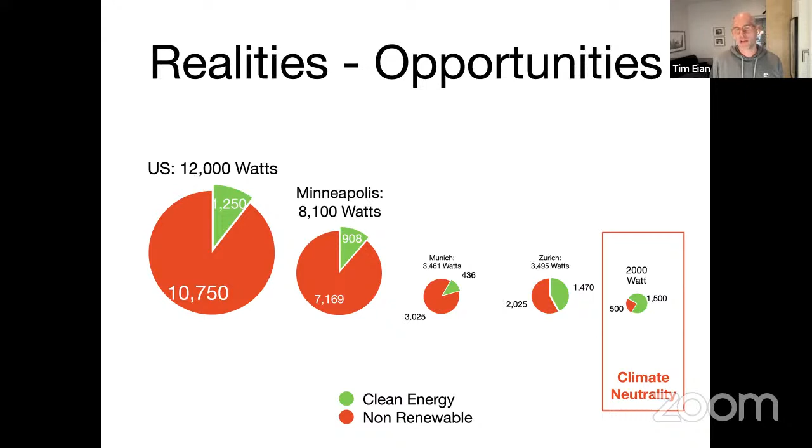Bad news and good news again, realities and opportunities. At 1,500 watts of renewables, we're almost already there, because in the United States today we consume about 1,250 watts per person in that way. So ultimately, if we can conserve properly, we don't actually need a much larger green grid. There's also some good news here.

One of the questions we have to ask ourselves, if you're a legislator, a mayor, a governor or president, is how do we want to invest into the future of this country and our people? We can do it two ways: substitute and try to make all the energy we consume green—that's a huge investment—or replace wasteful energy use with efficiency and get rid of it. We can look at sufficiency, how much of anything we need in our lives, and maybe find savings there, and the rest can come from clean energy.

This is a general discussion we should all be having, and obviously our elected officials have to conquer and ultimately lead on.

When we're talking about buildings, there's one big elephant in the room. I know from talking to EV owners and people with PV systems on their roofs, this is something a lot of people quickly overlook. When we look at the energy footprint, especially here in Minnesota, our biggest energy expense is actually not electricity, which is easy to get green, but natural gas, because we have massive heating loads. Where are they coming from? Our buildings. That is really what we need to conquer.

The bad news with gas is there's really not a good replacement for it on the horizon that makes it completely climate gas neutral.

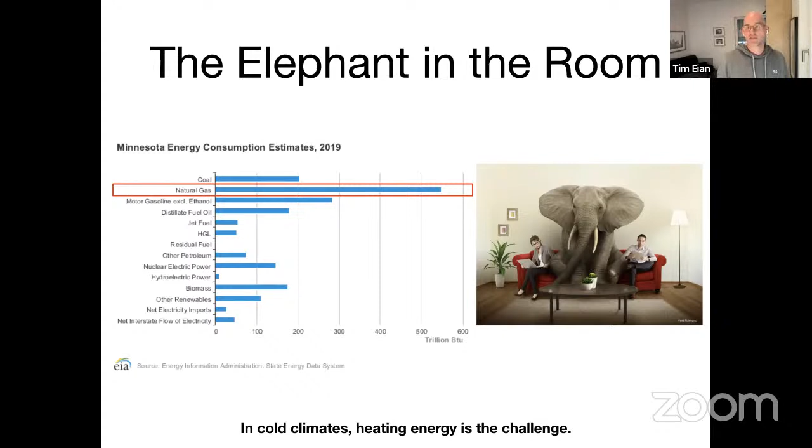So we really haven't fixed the problem with the building, but we've put an alternative energy source on the roof. And here's where a lot of the misunderstandings come in. I find that most of the populace around me thinks that with some solar panels on the roof, they can wipe out their entire energy footprint or carbon footprint.

And it couldn't be further from the truth. Most people struggle on their own roof to break even with their electricity bill, let alone the heating and hot water energy use. So this is really questionable, if this incrementalism approach is ever going to get us to a substantial leap in buildings that'll push us in the right direction.

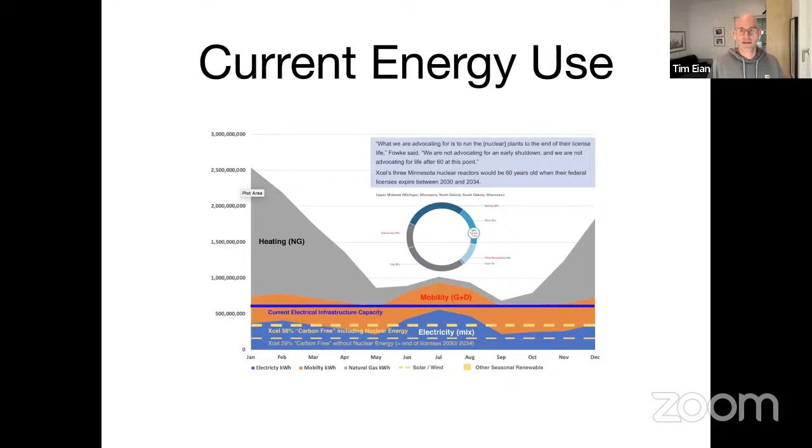So we have an issue here where right now our electricity companies are already struggling with a hot summer day in the middle there somewhere to get on top of a cooling load peak. Now imagine what they'll do when we all switch to electric furnaces in January, as you can see on that graph. It's insurmountable. And then on top of it, we all want to drive electric cars, and then we want to fast charge them. You can start to get a picture of what the dilemma is.

So the current clean energy plan for a state like Minnesota, which is substitution, electrify everything, simply doesn't work. We don't have the electric capacity to do that. We don't have seasonal storage. There's a whole slew of issues that isn't really solved for this kind of approach.

And the smorgasbord that I'm faced with in my job on a daily basis is that, again, people think some solar panels on the roof will surely fix it. And then we'll talk about net zero this and net zero that, and a high efficiency furnace and a high efficiency AC. I can tell you from field notes, what I've learned in over 20 years of practice in Minnesota, none of these things are going to get us to carbon neutrality in the built environment, which again locally is about half of all the emissions that we're facing.

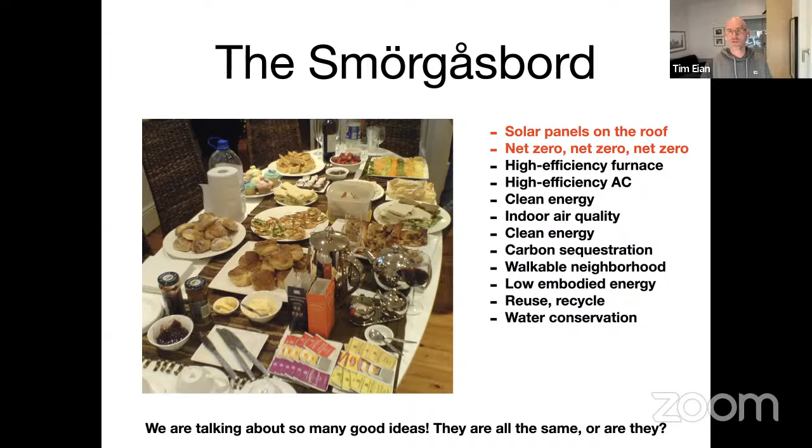So there's a lot of great ideas and they all have their place. Don't get me wrong, we need to do all those things too. But there's also, unfortunately, a lot of greenwashing in the sense that we're constantly being told everything will be fine, the track that we're on will lead to success, when practitioners like myself and my colleagues in the field see that that simply isn't going to work.

And so the impression, and the reason why I want to talk to you about conserving energy in a home setting like a passive house, is that we cannot solar panel our way out of this. It simply isn't going to work. We need much better buildings and much better building envelopes in particular.

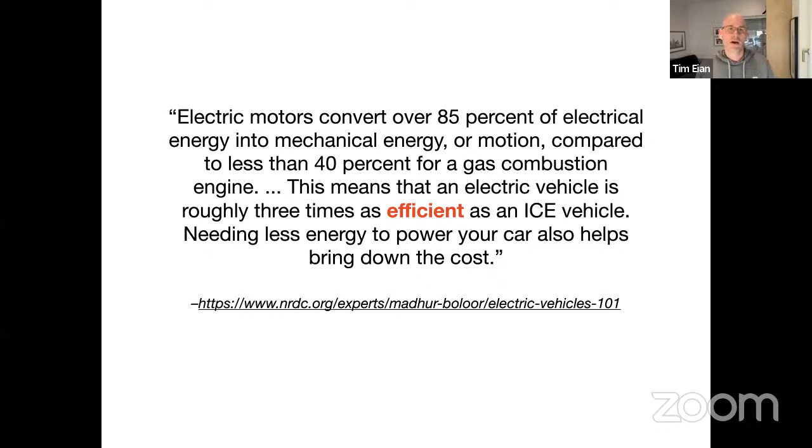And as an EV owner, you know that, and you experience that every day, because an electric motor converts 85% of energy into mechanical energy, whereas a gas combustion engine maybe can do 40, and that's, I think, already being very kind. So efficiency is really the name of the game. The more efficient we can be, the less energy we need to do exactly the same thing. So that's really what it comes down to. I simulated that for the city of Minneapolis in a study that I did for them.

The answers for buildings are really simple and basic. This is kind of a joke in our internal circles—to make such a high-performing building, it really doesn't take very much at all. We're not waiting for a big Tesla-market-disruptor type technology.

We use insulation, we use more of it. We seal buildings up tightly—that's tapes, caulks, sealants, readily available at any home improvement store. We do something called avoidance of thermal bridges, which in layman's terms means: if you go outside on a cold winter day and rip the arm off your winter jacket and let your naked hand and arm dangle out, that's a thermal bridge. Now you've got part of yourself out in the open, and that cold creeps up your arm under your jacket and makes you cold.

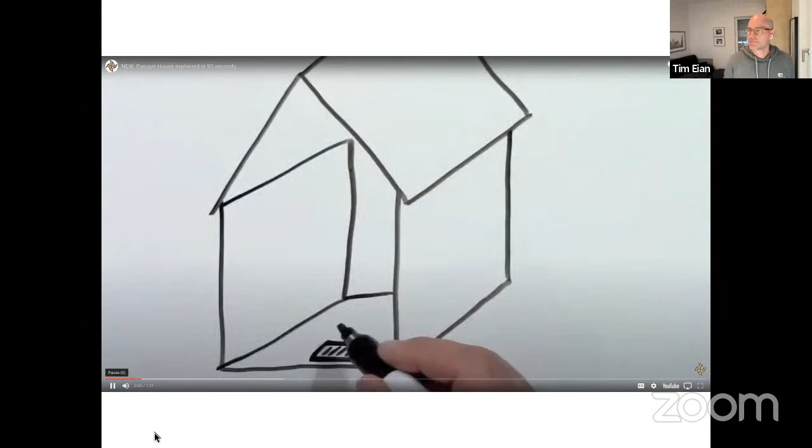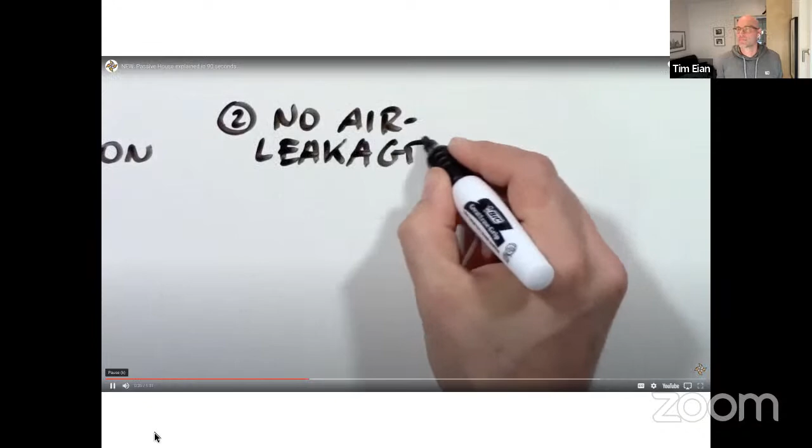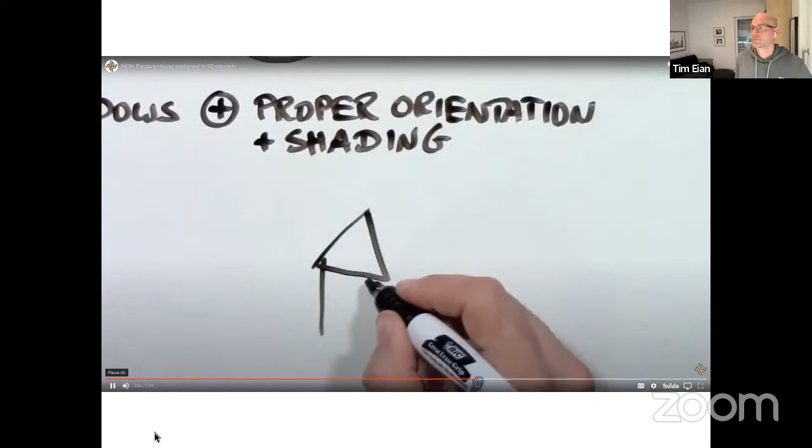Passive House explained in 90 seconds. Does your house have a heater in the basement or maybe a fireplace? Probably also a central air conditioner or maybe a window unit. Did you ever wonder if it was necessary? In 1991, Dr. Wolfgang Feist built the first passive house in Germany based on research from all over the world. Here's what he did: 1. Proper insulation—it's just like wearing the right winter jacket. It also doesn't need a heater. 2. No air leakages—there should be no holes, small or large, to let warm air out of the house. 3. No thermal bridges—a thermal bridge is like a road for heating energy in which warmth can travel right through your walls. As a matter of fact, most of our houses have thermal highways in the walls where heat can easily travel to the outside. Plus, the house needs proper windows, most of the time with triple-pane glass, and it needs to be oriented properly so the sun can heat it in winter and shade is provided in summer. And it uses an HRV, a device that provides the inside with fresh air without letting the heat out. Add all these things up, and it turns out your house doesn't need a heater or an air conditioner. So where does the heat come from? A passive house needs 90% less energy, and that can easily be supplied by your body heat, the sun, your appliances, light bulbs, and even your TV. This saves you a lot of money on your heating bill and helps preserve the environment. Did we make it in 90 seconds?

So there it was. All right, so basically a quick recap of what I said. For those of you who prefer a graphic, here's a quick graphic that shows these five key components again.

I'll put one little caveat over the top of this lovely video: in Minnesota, because of our weather extremes, we do need a little bit of a heater, and we also need a little bit of an air conditioner. In a moderate Central European climate where this originated, you can basically heat and cool with the ventilation system, no additional systems needed. In Minnesota, we need a little bit more.

To put that in perspective, the house I live in is just over 2,000 square feet, and on the coldest day of the year at about -25 outside, I can heat my house with 2 hair dryers going at the same time. So you get an order of magnitude there. I still have a heating and cooling system, but they are very, very small.

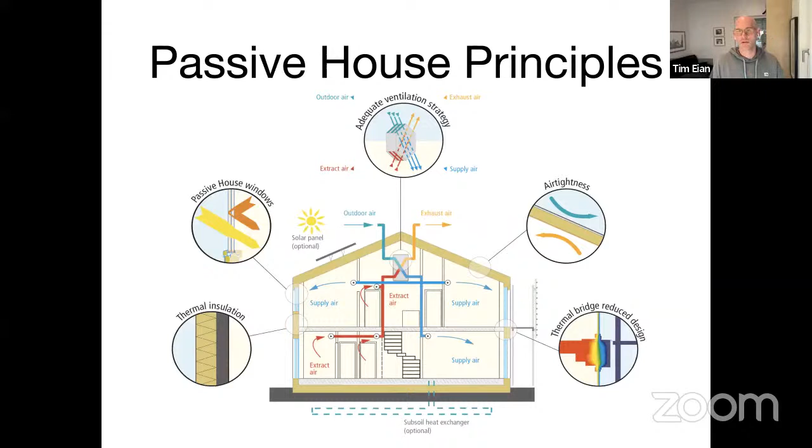So then, in the vein of what is the potential of this: you as EV owners can see about 50% savings in energy and emissions over ICE engines. In Passive House, when we apply it to new construction code buildings, we're typically seeing above 50% improvement on overall energy consumption and footprint. When we retrofit older buildings, we generally see over 80% savings, with extremes landing over 90% on some completely uninsulated buildings we've worked on.

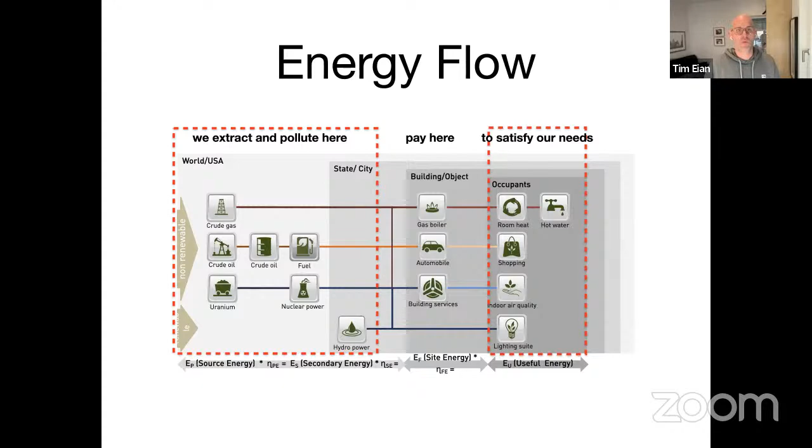I also want to give you a quick update on a better path, I think a better path. I did some work with the city of Vancouver some years ago, and they are doing a track of sufficiency, efficiency plus renewables. The conventional pathway of extracting energy and creating a bunch of emissions to satisfy our needs for light, heat and hot water—they looked at that and said, that's just not sustainable. We got to come up with a better system.

So what I told you before, we still need renewables here. We can use hydro, we can use the sun, we can use wind to power a bunch of stuff, but then immediately you run into this issue of, well, there's just not enough of that to go around, and the sun doesn't shine at night, and the wind doesn't always blow. How do we deal with that?

So the key messaging from my first section tonight is that efficiency is the first renewable energy. If we use that wisely, in the case of a building, we're looking at Passive House, this building energy standard I'll be talking more about tonight. Then we partner that with another thing I haven't gotten into yet, which is embodied carbon—using materials that have a small energy and carbon footprint. Only after we've done that do we electrify everything. The notion of electrifying everything is still right, because that's the fuel we understand how to make in a green way. So that's correct, but we need to compact ourselves first before we do it, and then we can fuel it all with clean energy and get to meaningful climate action.

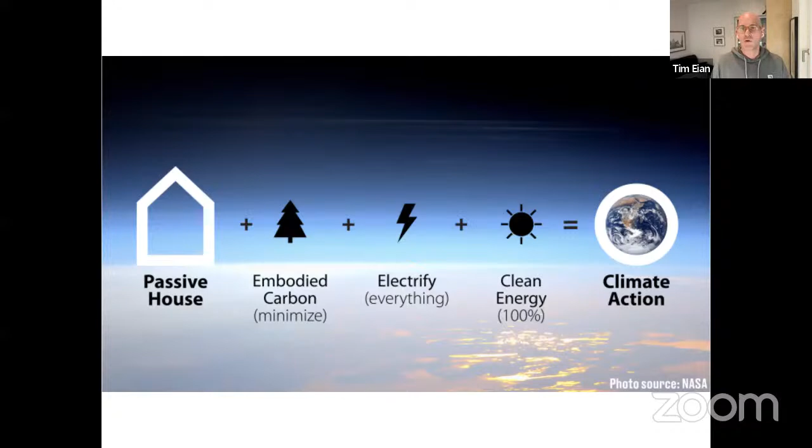So that's my appetizer for you to sort of embed the whole conversation of why do we need to make substantially better buildings. For those of you who want to follow up, I'm not going to leave this up a long time, but there's some links I can send out later. There are some good articles on that.

Transport and building emissions aren't separate. It's another sort of rabbit hole of, we live here, we work there—is that really an efficient way to go about life? With COVID, that's actually changed perhaps for the better for many of us with work from home. But that's another discussion worth having.

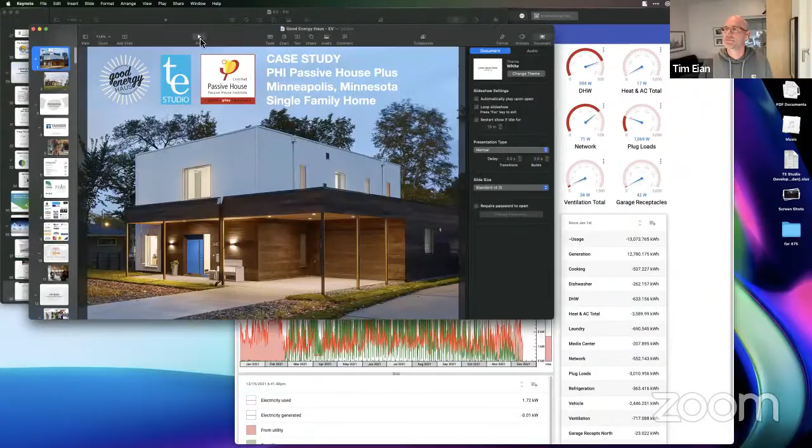So that's my opener. Yuka, if there are already burning questions, I'm happy to take a couple now before I get into the case study. No, I don't see any burning questions yet, so just keep going. All right.

Quick transition. So we'll talk a little bit more about the house. We gave our house a name. It's called the Good Energy House. And that was done on purpose because, again, we want to be part of the solution, not part of the problem. So we want to look at energy not as the problem in the room, but something that can also be good.

You're looking at the front facade of my house. This is the front entry here. It's covered. I have an attached garage with a garage door that you can barely see. I don't want everybody to look at the house and think that I live in a garage, but wanted to detract from that a little bit.

And I made this canopy so that people can arrive safely in any kind of weather. We have zero-step entries. And these are all just ideas that I do practice as an architect to make sure that buildings are valuable to their inhabitants and to future generations. So building in an accessible way is important to us.

Also, utilizing earth-friendly building materials. We could talk about that more—it's not going to be my main focus today, but I use a lot of either recycled materials or natural materials where I can in my architecture to further enhance the whole value proposition. Some of it you see in this image here.

For Minnesotans, because we care about water quality, I will also have you know that we have stormwater managed the entire site. Just to the left here, it was just coming in at the time, is a giant rain garden. There's one in the front and the back, and we are proud to capture all of our stormwater on site and infiltrate.

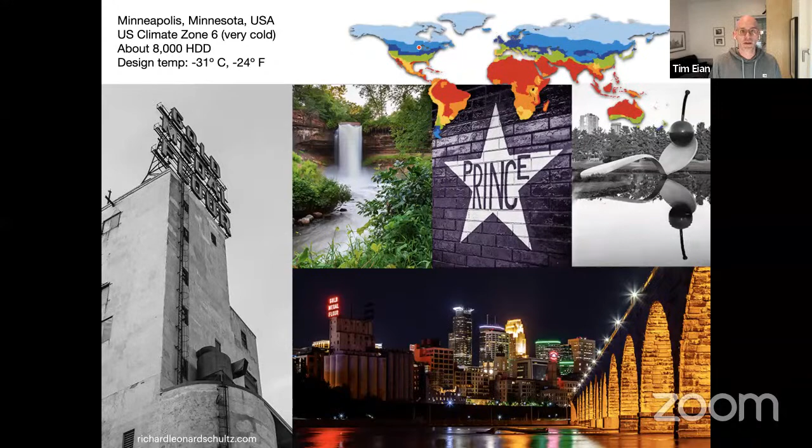I live in Northeast Minneapolis. My family and I were fortunate enough to buy a property on the same street where we had lived for 18 years. The property was completely dilapidated, and while this doesn't really matter for the Passive House, it's part of our story. I'll show you a couple of pictures.

We're also on a footpath that connects a few blocks up here where I live, and it's a unique feature. People walking by on walks isn't typical, and we really enjoy that—meeting people that way and waving to them and saying hi.

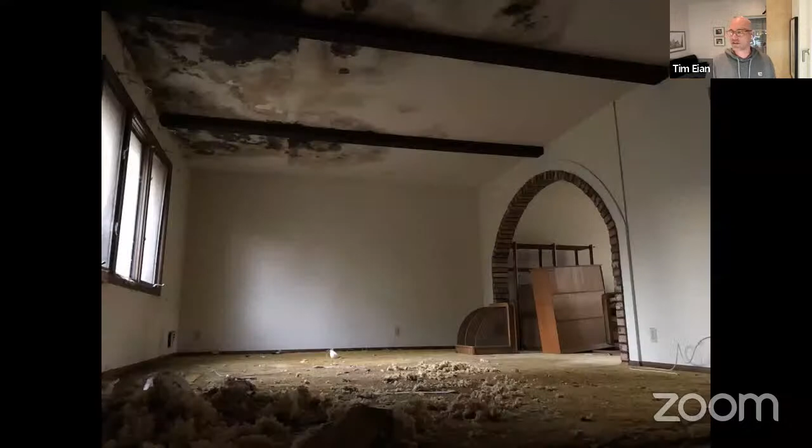When we bought the property, it was completely run down. Unfortunately, it was still inhabited, and there's a longer story I won't share tonight. This isn't entirely uncommon—I've seen other houses like that, and I want to remind you to keep an eye on your neighbors, because there are people out there living in conditions like that who need desperate help. Think of them, especially as the weather turns.

The house we purchased wasn't really sold as a home. It couldn't be, legally—it needed to be demolished. So I'll give you a quick sense of how quickly a home goes down.

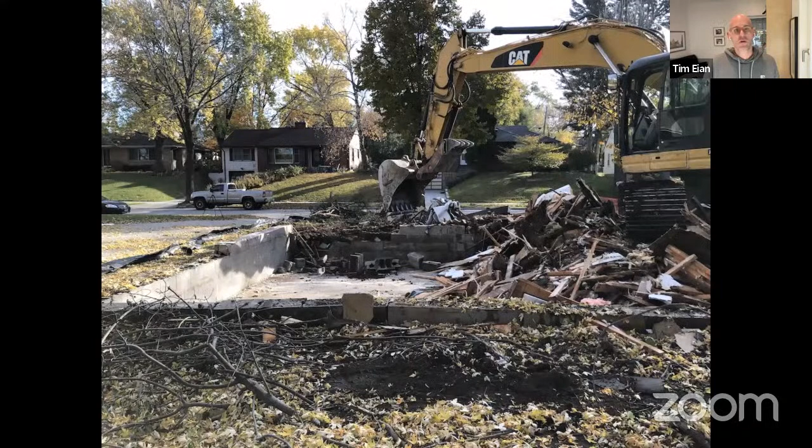It was 1970s or early 80s construction, and the whole building was disposed of in less than an hour. There's not a lot of girth to how most of what we build is actually built. The foundation took about as long to pull out as the house did to demolish. Then we started from a clean slate, more or less.

We had the good fortune of acquiring a double lot, 80 feet wide. Looking at it on the east side, to the left is south, and there aren't many obstructions, which is wonderful for passive solar design—part of why this property appealed to us. Let's browse through a couple more pictures.

The old home also had the garage on the south side, so there were no windows there. The first thing we do on a lot of urban sites when we develop them is turn the whole layout. My house now sits basically turned 90 degrees, so the long side faces south, giving maximum capacity for bringing in free heat.

And then when we come up to the second floor, I'll start at the stair again. You come up to a landing. There's a hallway on the south side, the bottom here of this drawing. There's a couple of kids' bedrooms where my girls live.

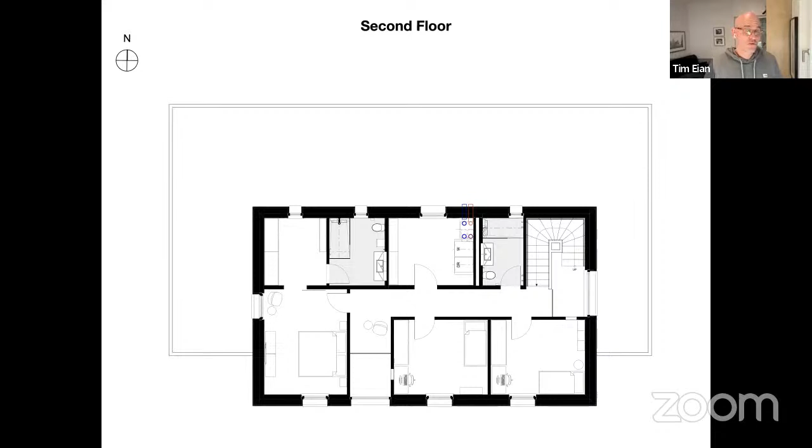And to put that in perspective, everything that sits in the ground is at about 2 to 3 times the code required levels of insulation. The same would be true for the main floor walls.

When we get to the roof, Minnesota roofs per code are fairly well insulated. We're looking at only about 80% more insulation than what code would require. But in general, it would be fair to assume that you're installing about 2 to 3 times as much insulation into a passive house as you would be to a code normal building.

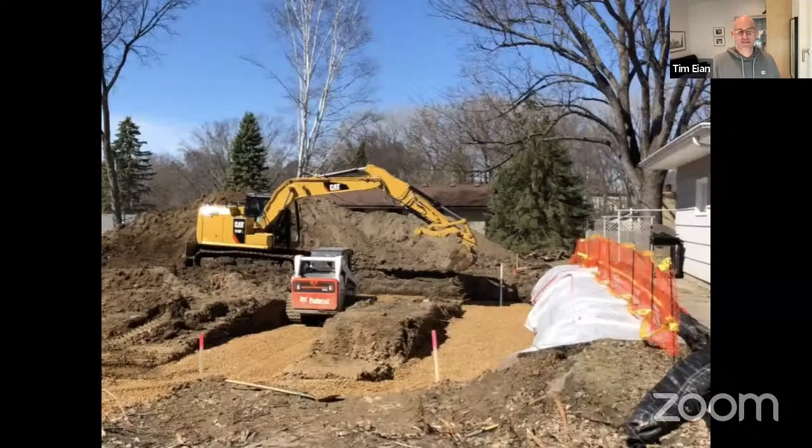So then let's build it from the ground up, right? First thing is you dig a hole for the foundation. Again, this doesn't have a basement, so you see these sort of trenches outlining, that's where the foundation itself for the building went. Then you put a crushed rock down. This is all standard stuff, I won't dwell on it.

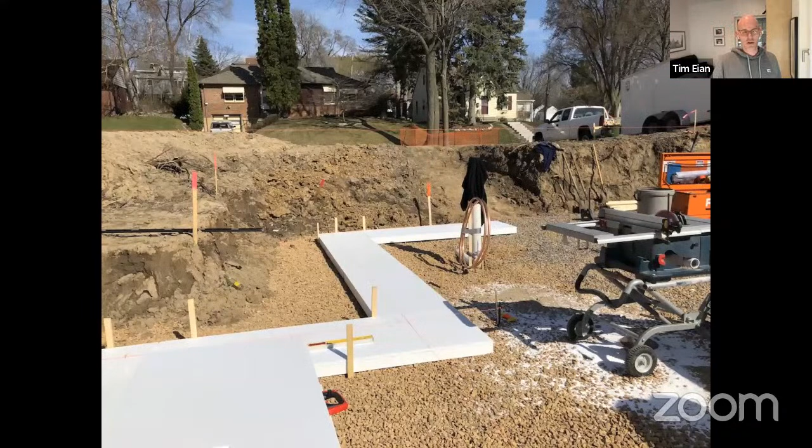This is where it starts to get exciting. So we use EPS foam insulation at a certain compressive strength to set the whole building down on top of. So you can see the outline now of the exterior walls being formed from this stuff. It's 4 inches thick. And then we take more of it and we create sort of a bumper. So rather than pouring a piece of concrete and then trying to figure out how to insulate it, we actually learned over the years we can build the form from the foam.

And then we go about it in a conventional fashion, put the rebar, the metal in it and all that, and then we float it with concrete, and boom, there is an insulated foundation right there that we can now build the whole house on top of, and the thing is completely packaged up.

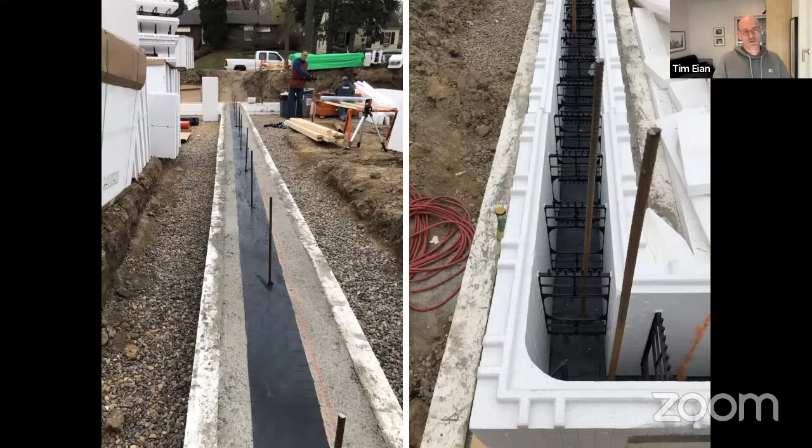From there, we have stem walls. So these are sort of half walls. In Minnesota, you have to, depending on where you are, go 3.5 to 5 feet down and then build back up. So we have walls that we need to set on top of this.

We used insulated concrete forms, which look almost like a Lego block, but they're hollow in the middle. Foam on both sides connected with a piece of plastic or a series of little plastic connectors. You just basically stick these things together and build up a wall out of it. You end up putting steel, rebar back into that as well. And then you order up the concrete truck and they fill the whole cavity full of concrete.

And so this does 2 things really well. Because it's an engineered system, it can be thinner than freestanding concrete walls. So we don't use so much concrete, which has a huge energy footprint, we use a lot less. And then secondly, we already get a good insulating value out of this wall. So that means that we have essentially a skirt all around our building that keeps the frost out.

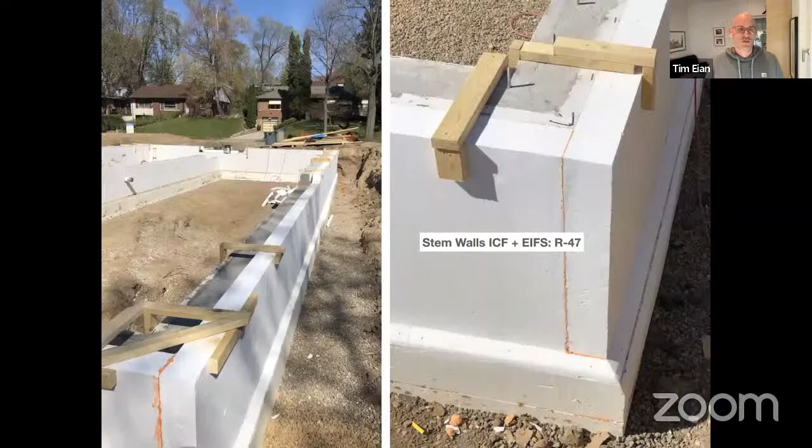So when it's all said and done, it looks something like this. We got the sandwich here with that floated interior concrete piece and foam on the inside, foam on the outside. For passive house, we needed more insulating value, so we clad it again with more foam. I say foam, that's one product readily available here in Minnesota and useful in this application, but there are other products, and there's some new stuff coming out that's perhaps a little less environmental impact and does the same thing, but I digress.

On the inside of the footer, you can see there was a little concrete still left exposed on top, so we even cover that up with foam panels. So the entire thing is packaged up and completely disconnected from the ambient air and dirt. And then we waterproof it. Nothing too exciting here, there's waterproofing stucco products out there that get troweled on. So essentially what we've built now, and this would be the same if you had a basement versus what I'm doing here, is a completely fully insulated, waterproofed, sealed up building envelope with ground contact that can go in the ground. After that's done, it gets backfilled inside and out.

And then some of the utilities go in, the plumbing has to go in, nothing too extraordinary here. And from there, we can move on to building the first floor walls.

So we decided to go for a wood wall because that's very environmentally friendly. Wood stores CO2, so building with wood is fantastic. We made prefabricated wall panels on site and then craned them up to where they needed to be. This is really no different than most home builds you'll see, with the exception that our studs are a little bigger. We use 2x8s, and we framed them only 24 inch on center, not 16. What that does is give us more cavity for insulation and less of the wall is wood.

Why would you do it? Well, insulation, as the name has it, insulates really well. Wood is not the greatest insulator. So we want to minimize the amount of wood in the wall and maximize the amount of insulation.

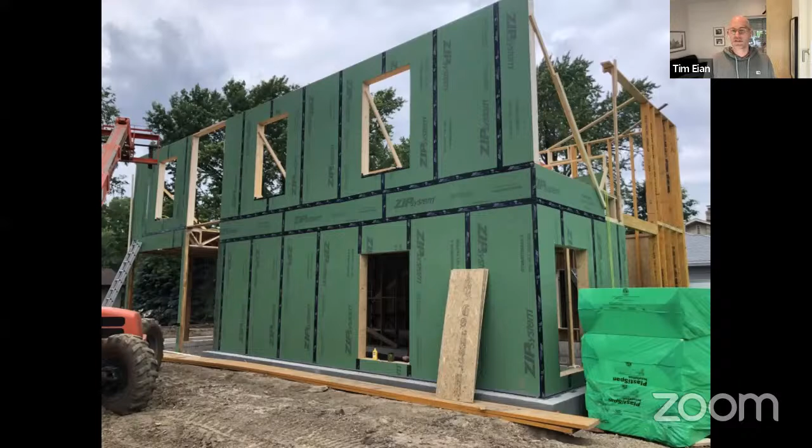These are just framing impressions, nothing much to see here. But in this picture, you can really see the air sealing coming to bear. And this product, if some of you have seen it in a different context, don't be confused. This paneling we're using here is sometimes used as exterior sheathing and weather barrier, but we're using it purely to air seal the house.

We're doing that in this layer so that we're not relying on a plastic membrane, which commonly in normal houses people would put on the inside of the studs, staple up, and drywall over the top of. We wouldn't want to rely on that because every time somebody puts a picture on the wall or hangs a shelf, they'll put a hole in that system and it will stop working properly. So we air seal this sheathing, which is about 8 inches in from the inside of the wall, and the chances of anybody ever wrecking this layer or compromising it are near nil. That's the appeal for us.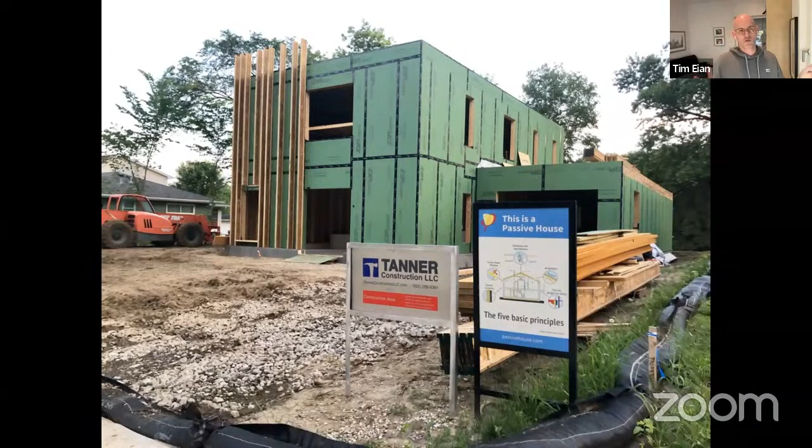We can get these in different depths, so we can dial this in specifically to meet our energy targets. In this case, we had a 2x8 wall, so the structural layer is about 8 inches, and we put 10-inch I-joists, as these things are called, on the face of it. So the structure of my house is 18 inches thick, and all of it is insulated. You can see a little bit more here, what's going on there with those things going up all the way around.

So we have now 2 cavities that we can fill. The next thing is the roof goes on. We have a low sloped roof, not a flat roof - that's a misnomer. All perceived flat roofs have a slope to them, and they drain to what's called scuppers. You can sort of see them here on this aerial shot.

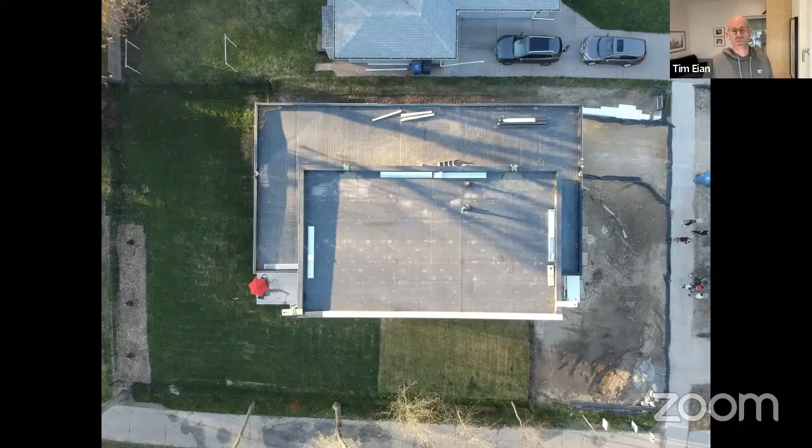At this point, effectively, we have sealed up the building enough so we can start thinking about putting in windows and other things. We built this in the summer of 2019, which was an extremely wet summer for any of you who remember that. So this system was put to the test immediately and often.

Once this box was up, we also looked at putting in the slab. In Minnesota, we have a radon ordinance - we have to put radon mitigation systems in place per code. To do that properly, you fill up the area, whether a basement slab or first floor, it doesn't matter, with rock, basically just gravel. Then into that goes a radon system. I'm not dwelling on that here.

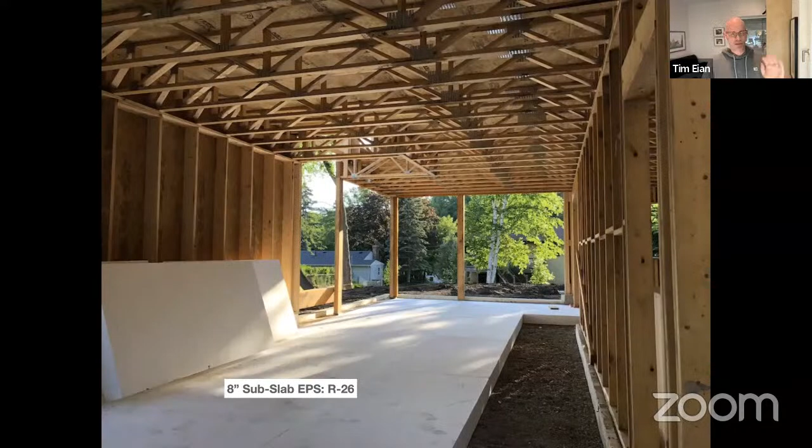From there, we're filling it in with EPS foam once again, because it has ground contact - it has to be a material that can stand that sort of condition. In our case, we used 8-inch panels. For most of my projects, these will be 6 to 10-inch panels, depending on how the energy model tells us is needed.

That system also wants to be completely sealed up for a number of reasons. We don't want air leaking in, we don't want air leaking out, we don't want moisture, and perhaps most importantly, we don't want soil gases like radon and other gases that might bubble up from the earth. So we take great care in sealing the building up on the bottom as well.

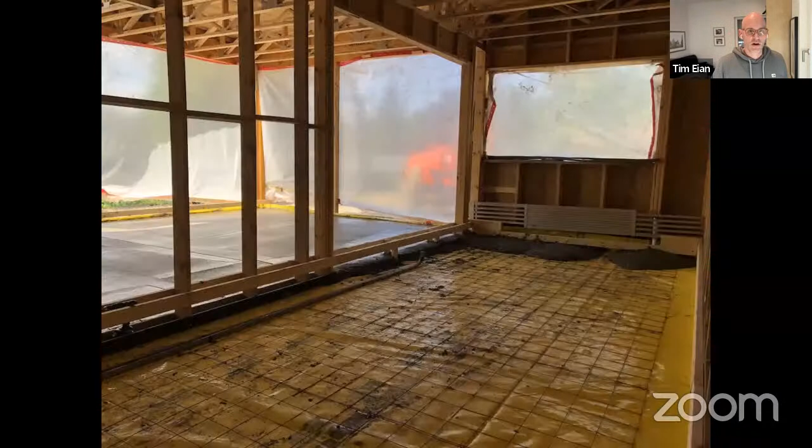Then metal goes in, similar to our concrete poured walls. And then the concrete truck shows up and the slab is floated, and boom, we got a concrete floor. From there, then we can progress and put windows in. You saw this picture before.

Most of the windows that we use in North America right now, especially in the cold climate zones for passive houses, are still made in Central Europe. They come out of Eastern or Central Europe. We have not been able to convince American window manufacturers to make a window at this level of performance. There are a couple of companies in the country that assemble windows like this, but they don't entirely manufacture them. Without going too deep down that rabbit hole, it's because some of the components that make up a window are not readily available, or suppliers don't want to make them readily available because they don't perceive the market for the product to be strong enough to warrant that yet.

So be that as it may, a lot of these things ship in a shipping container, which happens for a lot of things in our daily lives right now as it is. So it's less exciting than you might think. They do get kind of heavy, I will say that.

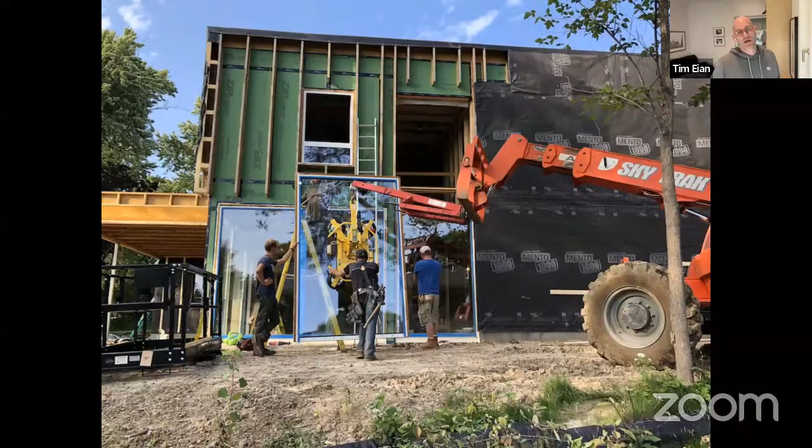The big window in my house is about 18.5 feet tall. It came in 2 sections - what you're seeing here is the upper section of that window. A unit like that is going to be hundreds of pounds, so in a high location it takes some gear to get it up there and get it in, which, quite honestly, was exciting, but it was also done in about 20 minutes. So it's not something that is insurmountable.

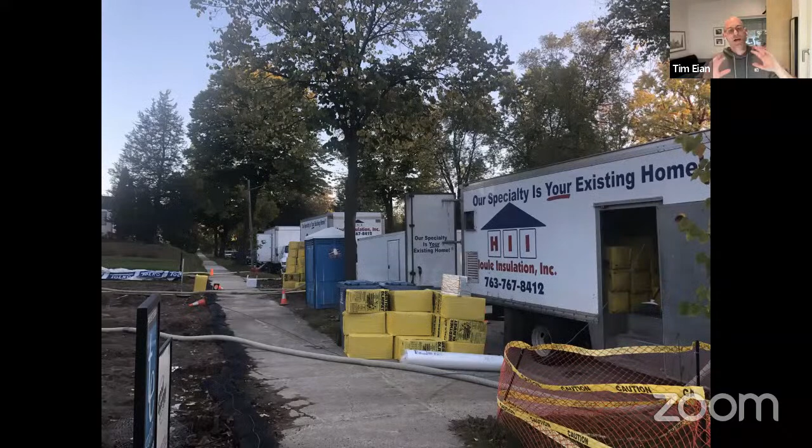With windows in, now we've got the building envelope sealed up, weather is staying out, we can start insulating. To bring the embodied energy footprint down of the whole operation, when you're using lots of insulation, it makes sense to go for something that has very little embodied energy. We're using cellulose in this case.

You can see there's 3 trucks sitting here. We probably went through maybe 10 of these trucks to insulate this house. This stuff is pumped in - it is compacted and pressurized into the cavities.

I've noticed that some people think cellulose doesn't work because it settles. If it settles, it was a faulty install. Cellulose is always to be compacted into cavities, and it's pressurized, and it makes effectively a custom batt, and it doesn't settle in that state. So I can give you that peace of mind for what it's worth if anybody has had a bad experience with cellulose. This is our roof.

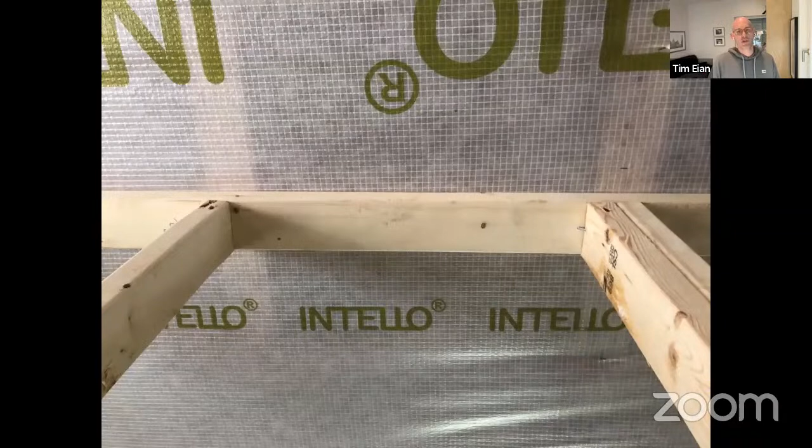Looking at it from the underside, we're using an air barrier product up here, which is a reinforced membrane. This is also back in our assembly. You can't quite see it yet, but our ceilings are actually suspended down for the same reason I gave you in the wall. We want to make sure that when electrics are run and lights are installed, we're not constantly poking through the air barrier and the roof. So our ceiling is suspended about 6 or 7 inches down from this plane.

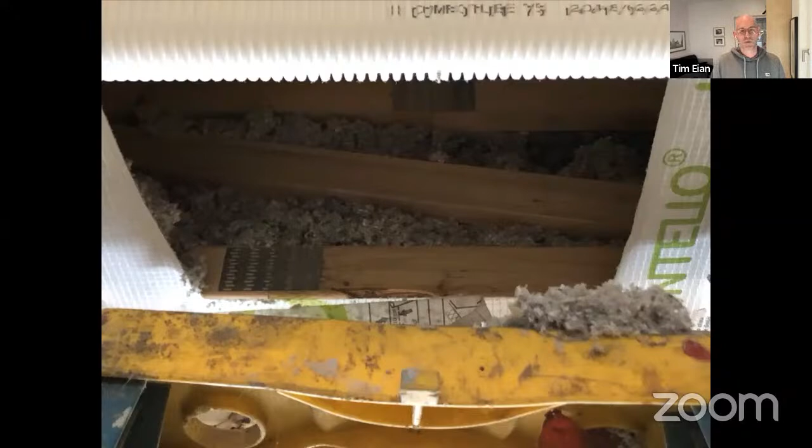This is the roof cavity itself, which is dense packed with cellulose. Cellulose, for those who don't know, is essentially recycled paper. The only treatment this product gets is a salt bath, which helps make the cellulose last, keeps vermin out, and keeps bacteria and mold out. It makes it very resilient to both fire and water, and that's what makes it useful. The process is literally just taking a bath in salt brine. So this is about as low an embodied energy footprint as you can get in insulation. You can see the ceiling cavity is fully pressurized here, so it's loaded.

Same with the walls - this is the interior cavity, the 2x8 stud walls of the house. They install a fabric mesh to compact the material into these cavities because drywall isn't up yet. Later this all gets covered with the drywall.

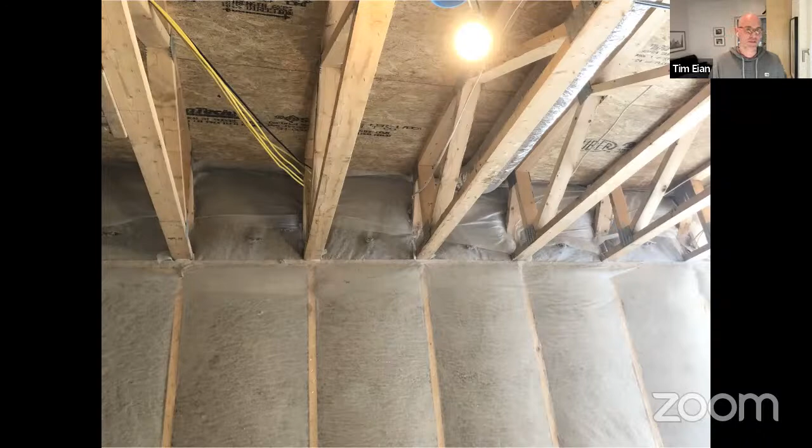Then this is at the rim joist, the area between the two stories of the house. It also gets netting installed, and then cellulose is pumped into the netting, filling that rim joist area up. This is a shot of our garage, which has a slightly different wall makeup, but similar idea.

We're using this air membrane material here for a number of reasons, but again we're just pumping the material in. From the outside, the building already had building paper on. They cut little portholes and insulated through that whole system into the cavity, filling it all the way up. You can't really see it well, but every stud wall cavity has one of those portholes, which were later seam taped shut.

Another big part of Passive House is building airtightly. Maybe just a quick backup - why would you build airtight? Very simply, leaking air in and out is actually one of the biggest wasters of energy in our parts. Traditionally, homes were built very leaky, and a lot of energy simply escapes the building. Remember my picture of the tent - we don't want to do that. So we have to have a controlled volume, and we do that by seam taping it, sealing it, and then testing it.

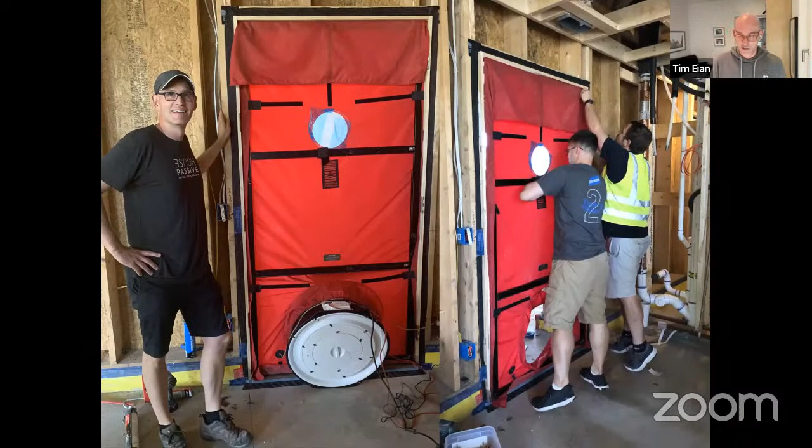That testing is done with an invention from our area - Gary Nelson of the Energy Conservatory was one of the first companies to sell a blower door, which is what you see here. Those who have had an energy audit done may have had somebody come out with a device like this. What it does is pressurize and depressurize your home and take a reading, giving an indication of how well sealed up the building is. So you can see that in action here.

I don't know if any of you have done a blower door test or know anything about the metrics. Minnesota Building Code requires buildings to hit 3 air changes at 50 pascals pressure, 3.0. My house on the first attempt blew a 0.36, meaning this house, even in its rough state, was already 10 times tighter than the Minnesota Building Code prescribes - which goes back to my comment that our codes are woefully inadequate for how we should be building.

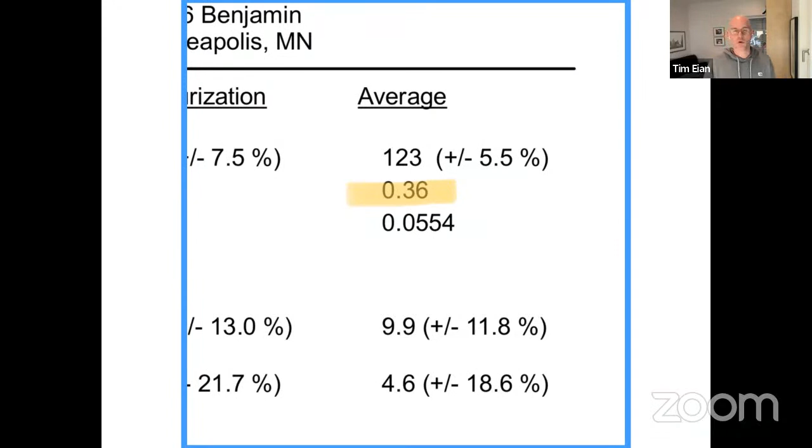From there, let's segue into mechanicals. I have my mechanicals on display. If it weren't COVID, I'd be happy to have you all here. I've had some small tours, and if anybody wants to see this in the flesh in the future, just ping me and we can see if we can get that set up safely.

We put it on display because we want people to understand what we're doing here. In Passive House, the mechanicals are generally fairly small, so we can hide them in all kinds of places if we want to. In my mudroom, you'll see in a minute, I have my water heater and my heat pump system. We use an air-to-air heat pump for heating and cooling of the home, and we also have an air-to-water heat pump system for hot water.

We also have a standalone ventilation system. I talked about that being one of the pillars of Passive House. I'll give you the graphic of the house real quick so I can tell you how it works in principle. The machine brings in air from the outside. In the winter, it pre-warms it with the outgoing exhaust air. In the summer, it pre-cools it.

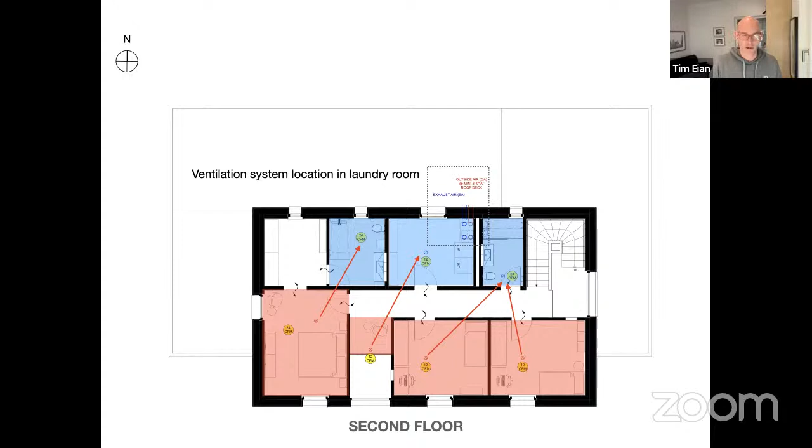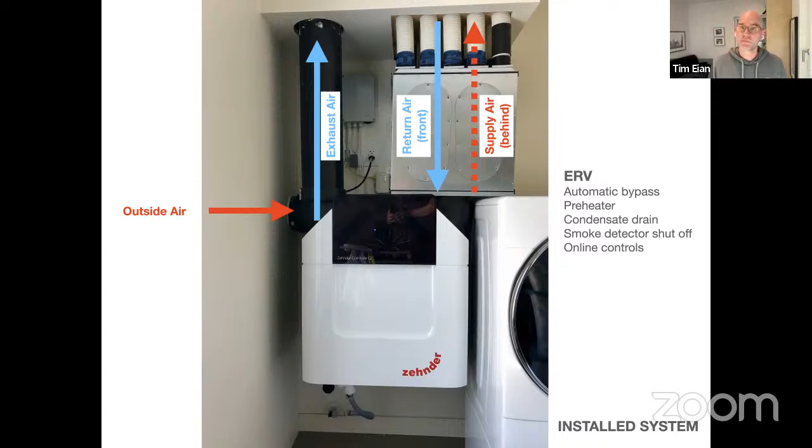Some of this stuff gets really technical, so I'll skip over these in the interest of time here. Just some images from the field.

The unit itself will take up the exhaust from the kitchen as shown here. Our range hood in the kitchen is a recirculating hood, so it has a grease filter and a carbon filter, and then it spits the air back into the room, and the whole room is ventilated with the help of the system. We also don't have any bath fans because the whole house system takes care of the bath ventilation. There really aren't any exhaust-only devices in our home, simply because they wouldn't work - we live in an airtight building.

Tim, one thing here - don't skip any technical details, because that's what this group lives by. So any technical details, always tell everything.

Okay, that one had more of a matrix of how the thing is wired. I don't want to exclude anybody here, but I'm also trying to be mindful of the time. I'm happy to go back there if somebody wants more info on the ventilation system. So thank you though, Yuka.

A couple of registers here, and in our return air register, we have an additional filter to keep the system clean. I find that useful, but not all of my clients do that, but it picks up a lot of additional stuff that otherwise might find its way back to the machine.

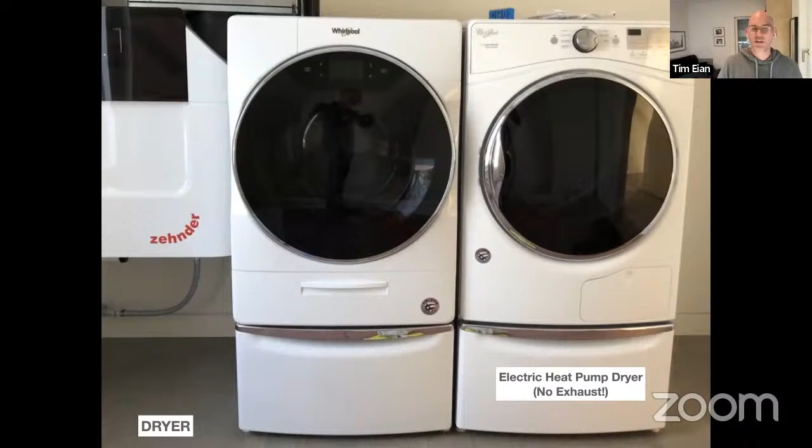I was talking about not having any exhaust-only devices, and here's another example of that. We use an electric heat pump dryer - this is an exhaust-less or vent-less dryer. That's great in a passive house because, again, we're not pulling anything in, we're not sending anything out. What this machine does is it condenses, with the help of a heat pump, the water out of the clothes and actually puts it down the same drain where the washer drains. Not only are these machines great for a passive house because of the airflow, they're also very, very energy efficient compared to conventional dryers.

I actually measure everything - you'll see this a little later here. I was able to find that this dryer, for everything it does, uses the same energy as my old dryer used just to spin the drum. So, to put that in perspective.

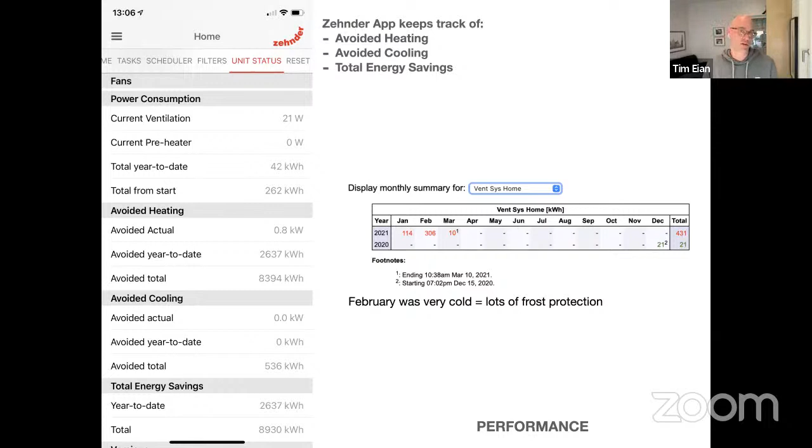I think I snapshotted this early in the year, so this may have been only after a few months of operation, and the system already identified about 8,300 kilowatt hours of savings by means of using a passive heat recovery core. That's heat that I didn't have to put in my house because I used an intelligent device to do this work for me.

So the heat recovery from that machine is really, really powerful. It is able to extract that much energy from the exhaust air from my home to pre-warm the incoming air to levels that are perfectly acceptable to live with.

I have something like that in my garage as well. This is a bit more geekery, perhaps, as a point source system. It's not ducted because the garage is one big open room, so we use these little point source heat recovery ventilators.

What happens here is that when it goes into exhaust mode, the warm air being expelled warms up that core. Then the machine, after about a minute and a half, switches to intake mode. And as it sucks air back through that core, it unloads the heat that it has stored back into the airstream. So this is another way of doing something like that.

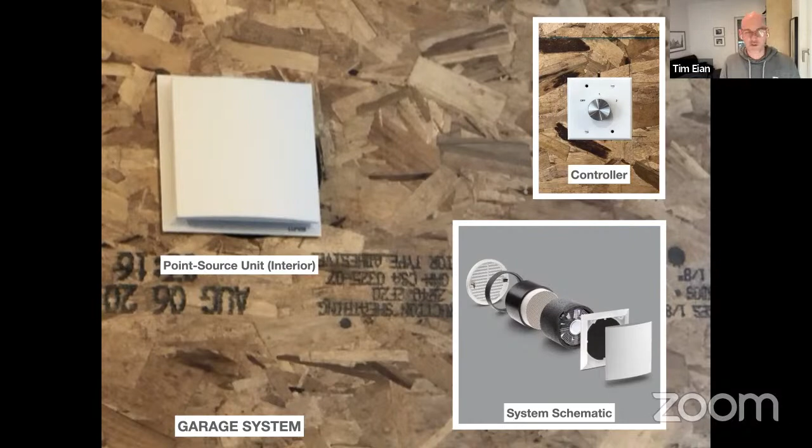It's a passive means of heat recovery, and that system is mounted through the wall. It's very simple - for a garage or a small apartment or an ADU it's perfect.

The thing that I found just stunning is that those little ventilators that I have in the garage run on 2 to 3 watts of load. They're actually running off of a doorbell transformer, and they average energy consumption of 2 kilowatt hours a month. So I ventilate my garage and provide it with fresh air, with this little energy expenditure.

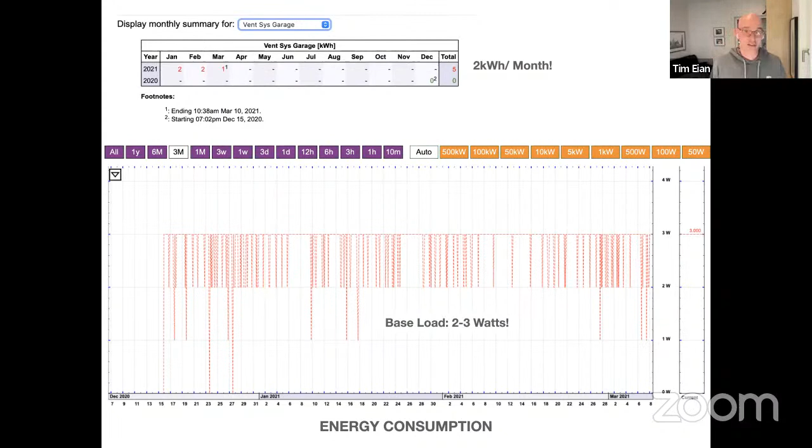All right, we'll talk about heating and cooling a little bit. So I already told you that in principle, it works like a furnace, and on the inside, there's just more of that.

One of the things that's great about a passive house is you're moving so little heating and cooling around, you can easily put the whole house on a single zone. There's no use for fancy dampers and other things, so this system can be extremely basic.

So that's kind of what this is here. As the passive house functions like a big thermos bottle with super insulation, all you have to do is stir the insides a little bit every once in a while to get an even distribution of heat and cold.

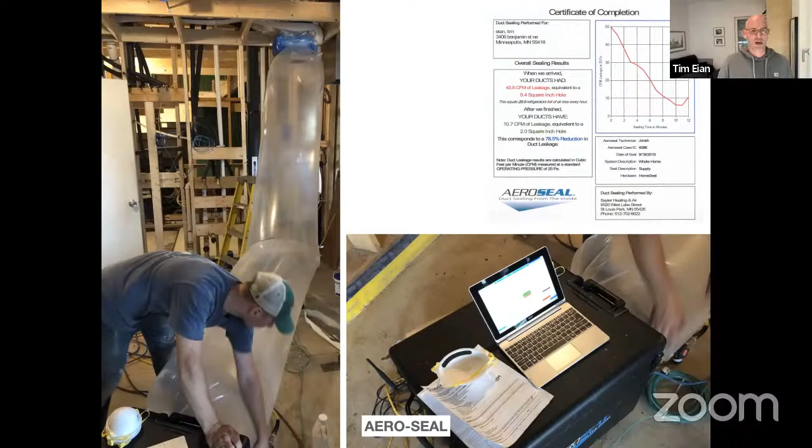So this really looks bog standard. The only thing we did is have it aero sealed, a treatment done because sheet metal is inherently leaky. They blow a starch-based, food-grade agent in there that finds all the little imperfections in the ductwork and clogs them up. It's a process you do once and done. By virtue of doing that, I can guarantee the air put into that system actually comes out of the register and doesn't just squirt out in the middle of a wall or ceiling in the home.

The manufacturers tell you the machines are good to 5 degrees Fahrenheit, but that's just what they test. They just keep going. I've put these in homes for probably a decade now, and we've never had any problems with that. They just keep soldiering on and do their thing.

This post heater on the inside, really what it does is: every once in a while in the winter there'll be conditions where the outdoor unit can ice over. There'll be condensation and the heat exchanger will ice over, so the machine has to use the heat it generates to thaw itself out. While it's doing that, it can't give me heat for the house. So this heater hat on top of the indoor unit kicks in while the outdoor unit is busy doing its thing. Last year when it got really cold in February, as we established earlier, that was the only time that ever happened for me, and it happened for minutes on the hour.

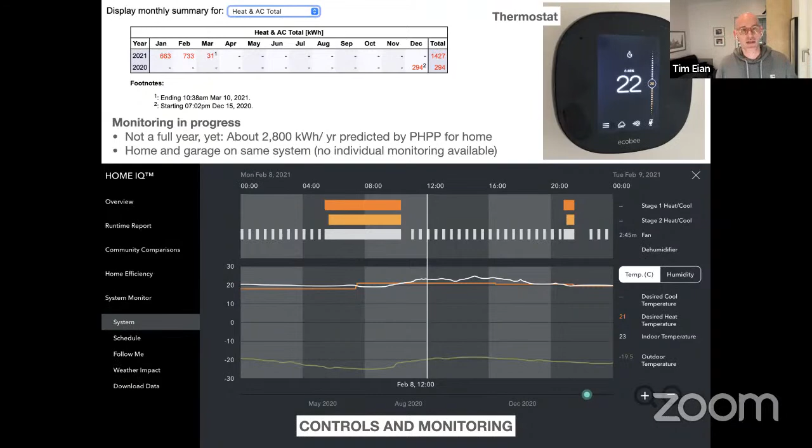There's a couple of things that happen to the plumbing in a passive house as well. We want to use energy sparingly, so the first thing we do is insulate all water lines, cold and hot. Why? Well, the cold water lines—when the house has more humidity in it, they can condense out. So this is more of a practical consideration; we don't want water dripping off cold water lines in the walls and ceilings.

The hot water lines are a different story. We make hot water with a device, and the whole reason we make it is because when we open the tap, we want hot water on our face, our bodies, our hands. So we need to get that precious energy from the machine to the tap. If we don't insulate the water lines, we're building a radiator—heating the house with circulating hot water. So in a passive house, all hot water lines are end-to-end insulated to deliver that precious energy from the water heater directly to the tap without it heating the home in the process.

It would also be counterintuitive, because my house needs so little heat that at certain times of the year I'd have to cool against that. Case in point: at the end of the year, we've used a little over 600 kilowatt hours to make hot water for a family of 4, in a COVID year when everything was done in the home. That's pretty phenomenal. It's two-part: one, using a heat pump system that pilfers a little bit of indoor temperature, and the other is making a plumbing tree that's highly efficient.

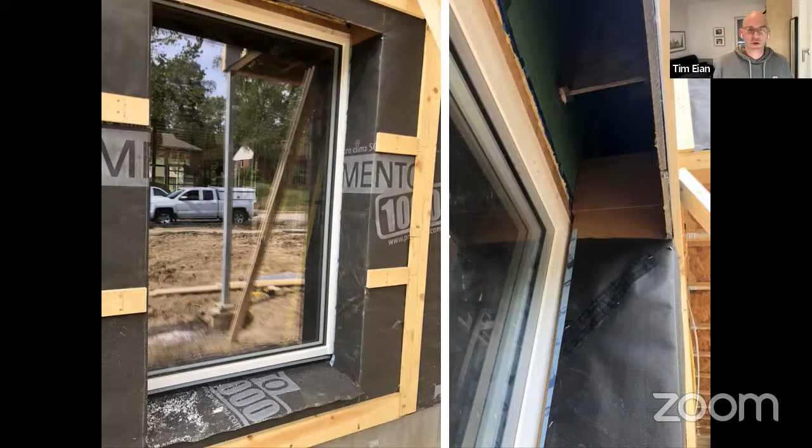That's how it's put around the windows. And on the right-hand side there, what you're looking at, that hole, that cavity is actually where our shade boxes got installed. I have a whole little blurb here on shades too that I'll show you in a second.

So let's build the house out. Standard stuff, we got stud walls. We ended up putting a wood fiber board on it for some acoustics. We wanted it to be a quiet home. When you have 20-inch thick walls with insulation and the roof and everything else and triple pane German-made windows, it is dead silent in here. So we didn't want to drive each other nuts. So the whole house is soundproofed.

In this picture, you can also see one of the tubes going to the ventilation system. And then earlier I had talked about how our ceilings are furred down so that when we do mechanics up there, we're not weaving in and out of the airtight building envelope. So other than the plumbing stack and the connection to the PV panels, there really isn't anything that goes through that layer. Main floor.

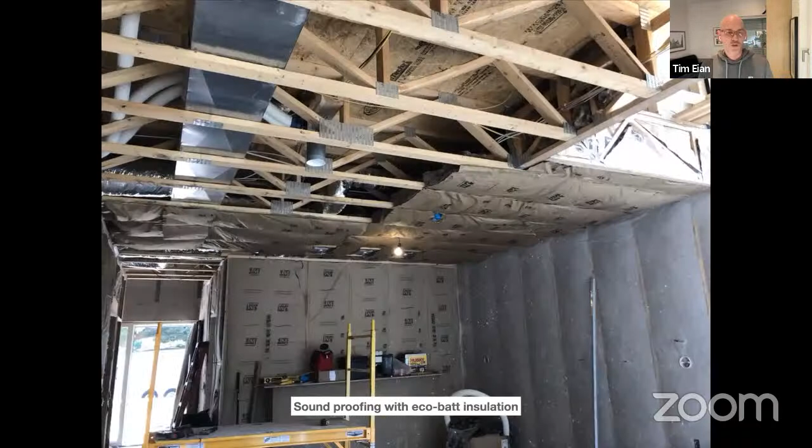All the interior insulation you see there is sound insulation. And then we use that wood fiber board again, which is sort of a break for some of the acoustics. Then we go drywall. This is actually a great shot because it also shows you one of those high performance windows open. These are tilt and turns. They come into the inside and they basically have three layers of gaskets for weather and air tightness. So they seal extremely well.

If any of you are looking at me on the screen, hello, I'm right next to one of those windows. They also tilt. I don't know if you caught that. I can do this a couple of times here. Boom. So they open and close like that for a ventilation position. So they tip in at the top if you just want air. And the beauty of that is they're not opening to the outside, so you're not putting them in the weather.

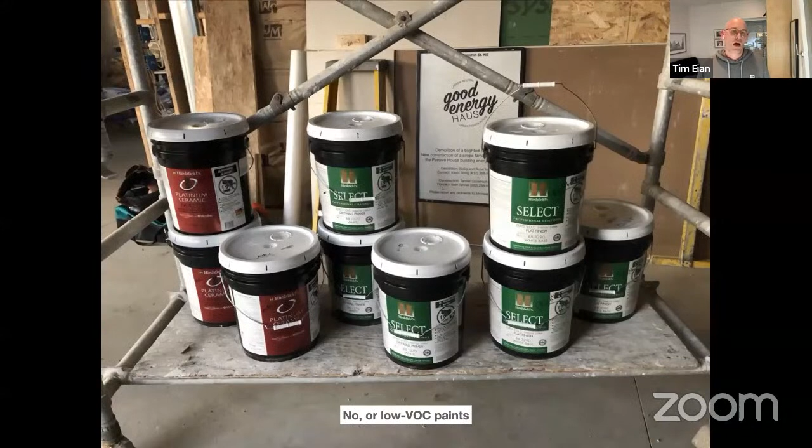All right, so another piece of the puzzle, no or low VOC paints. And by extrapolation, this is true for flooring products, cabinetry, and other things we brought in here. We're in an airtight environment, and really most buildings are on one level or another. And so we don't want to burden ourselves with chemicals. And so that's something that as a company, I've always paid great attention to. So no off-gassing from the stuff that we bring into the house.

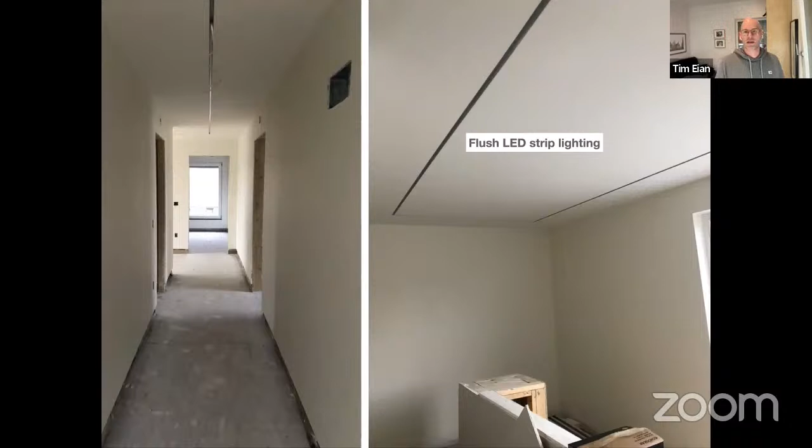Couple of other things. I know you like the geeky stuff too. So we have flush LED strip lighting on both floors, not in every room, but this is just where lighting is going in this day and age. So rather than doing a bunch of can lights or pot lights, we now have these things that you can either let into material like wood on the lower level, or you can drywall up to. And so here's some construction impressions of those things.

Just from the architecture and nice to have side, we have railings made from glass. So it gets a little exciting when you're on the second floor looking down. You're basically, seems like there's nothing separating you from the fall. And that's just sort of a little moment of enjoyment and excitement.

All the wood you see is reclaimed ash wood from Wood From the Hood. So Minneapolis has to take down all its ash trees. They give it to Wood From the Hood. They turn it into useful building materials.

And so we made our ceilings and our stairs from that.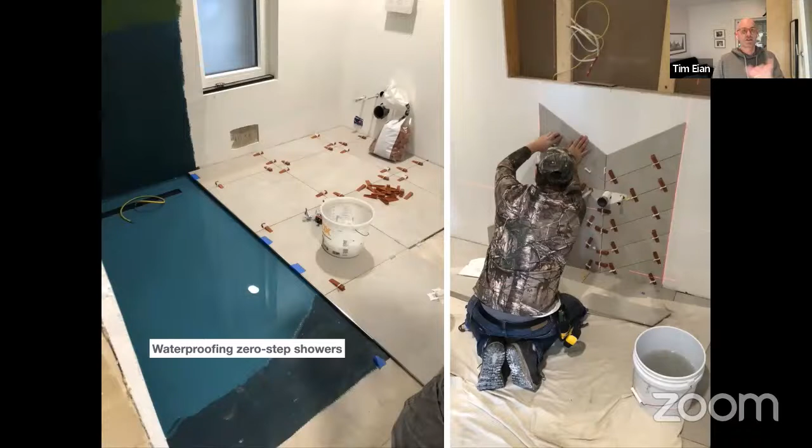So then just to complete the story of the house being built, showers go in, tile goes in. We have zero-step showers - again, I talked about making age-in-place type buildings. Why is that important? Well, if a building isn't useful to its inhabitants, there's no point in having it. People won't love it, they won't care for it, they'll be aggravated by it. Again, we want to be part of the solution, and that's not just energy and carbon - that's also giving people a fair chance if they have trouble getting around. So the house is accessible in that way.

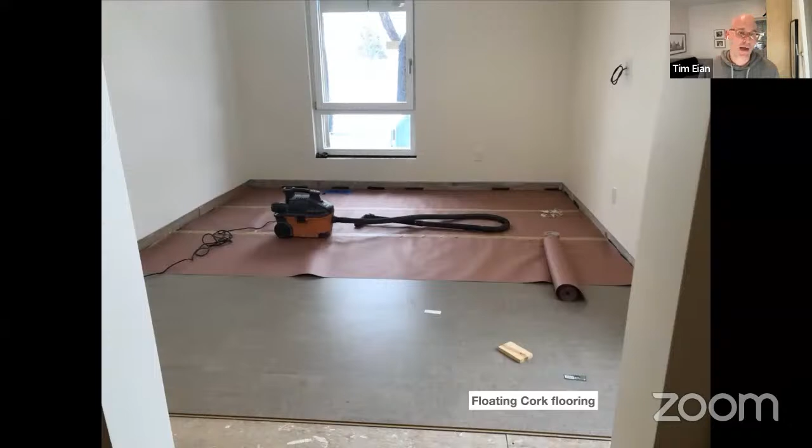Flooring is another one of those materials that can be a really bad offender for off-gassing. So we used a cork product that came with a bunch of environmental certificates, and cork in general is a very environmentally friendly material. This is on all floors with the exception of where we have tile.

Nobody. All right, I'll talk about the siding real quick, and then we'll wrap up the tour.

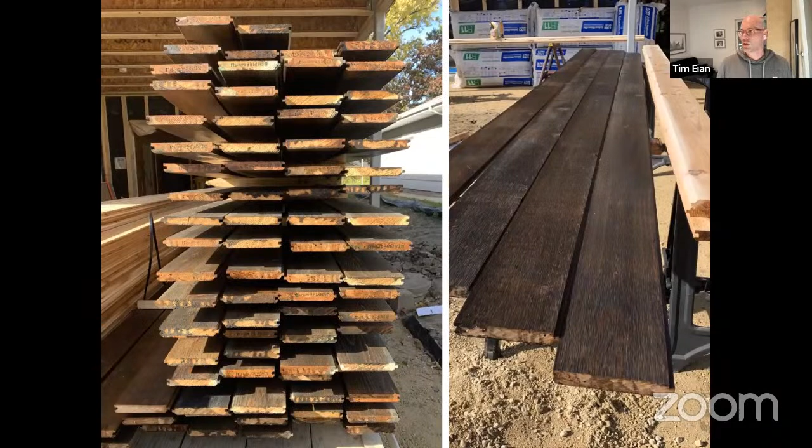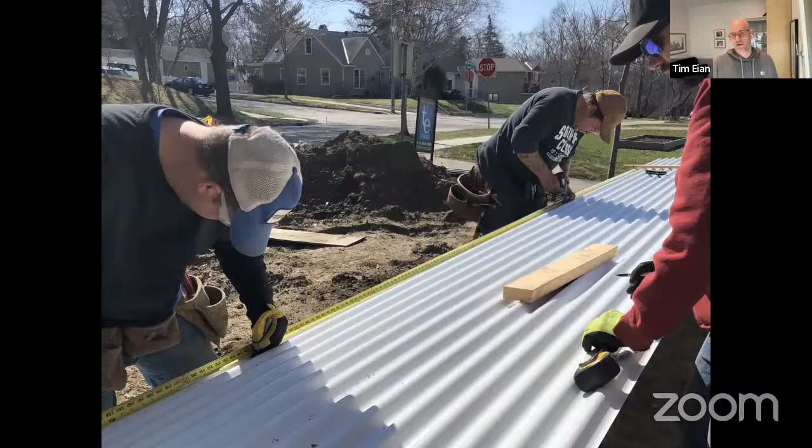And then we use steel. We use it a lot in our firm simply because people don't like maintenance - I don't like maintenance. Steel properly installed has a 100-year maintenance cycle - there's no caulks, no paints, nothing like that. So once you put this up, it's essentially fire and forget, and that's what we do. It's not a shipping container - many people have asked, it would be too large for that. So sorry to burst your bubble if you thought we build shipping containers.

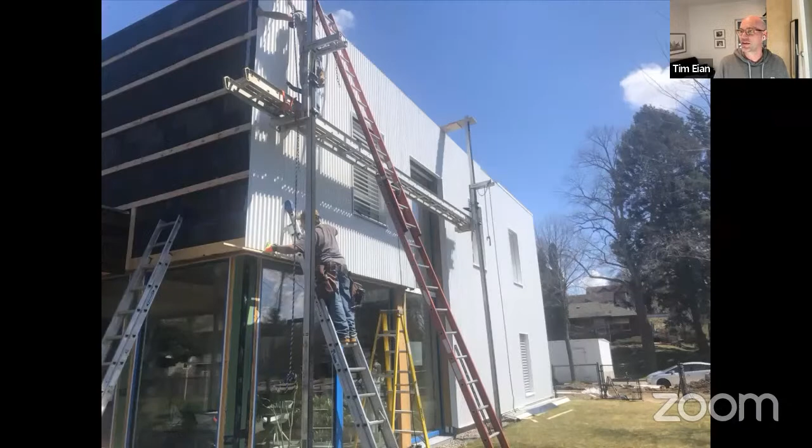But yeah, it's corrugated metal, and it comes in many different shapes, sizes, colors. We opted for this black and white with those blue window frames in the middle color scheme. So you can see that all being installed - it goes up rather quickly in these large sheets.

All right, so then we'll top it off with the shades. I already told you that I have exterior shades on the home - you may have seen them show up here and there. And that is because this is a passive solar house, so the house effectively is a solar collector. It collects sun energy, so I have to manage that somehow, right? And so we do that with the help of shades, and they need to be controlled somehow.

So we have a minimal amount of automation in this house. It doesn't have to be that way - I have some clients who have literally wall switches up and down, and that's all it'll ever be, and that's fine.

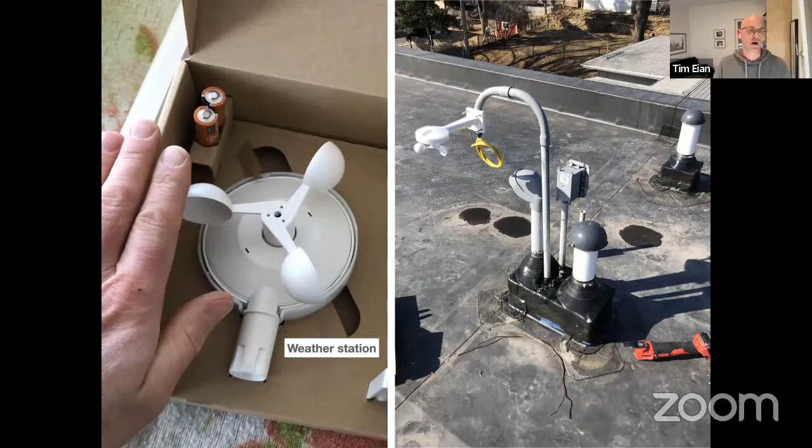So we opted for a minimal automation with this thing called the Loxone mini server, which is literally smaller than my hand. It runs a base program based off of different sensors throughout - there's a weather station up on the roof, and some thermostats throughout the home. Based on that, and knowing the weather forecast, it can make choices for us as to when to put these shades down and articulate them.

Think of these things like mini blinds - you all know what they look like, but these are on the exterior, a little bigger, still made from aluminum, and they can articulate, go up and down. They give you privacy, glare control, darkness when you want it, and they keep the sun heat out. The Loxone system is even smart enough to understand the prioritization of daylight over heat gain, so we can set it up to say we want maximum cool or maximum daylight, and it'll articulate them slightly differently. If you want to get fancy with it you can, but you wouldn't have to - this would even work off of a simple up and down.

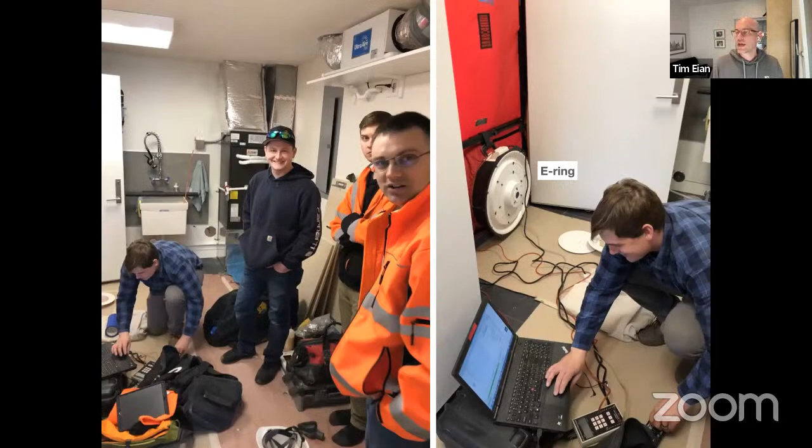At that point the house is pretty much done. The blower door crew came back - for the passive house standard we have to take another read. This was slightly corrected afterwards to a 0.22 I believe, this still says 0.23. Every little bit helps, but Minnesota standard is 3.0, so we ended up at a fraction less than 10% the leakage that's permitted in our state, and that's good for a passive house.

Then we decided, with Xcel raising their rates and whatnot, to top it off with PV panels. Not necessary to make a passive house - this is purely us enjoying ourselves. But we put a 12 kW system on the roof.

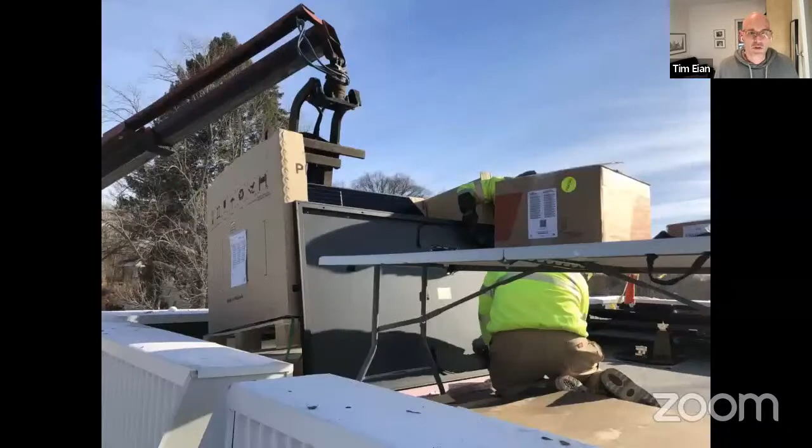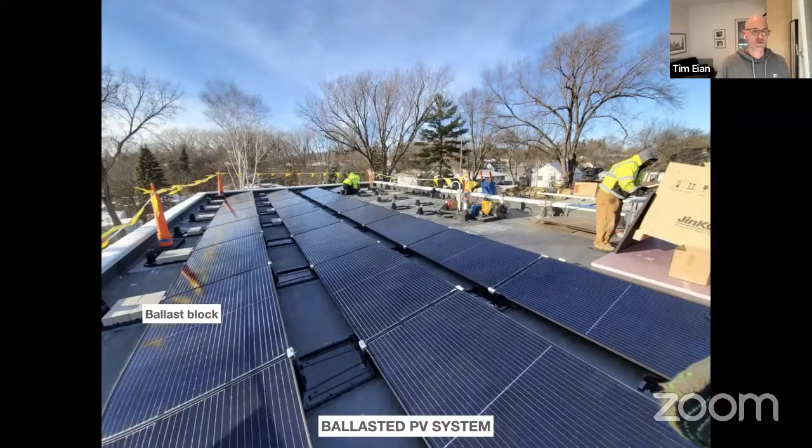I assume many of you will have something like that as well, so you're familiar with this. On the low slope roof, you're not going to bolt this to the roof slope or a rack system - it goes on these runners, these little plastic feet, and then they simply get snapped into place and weighted down with a ballast block. So it's a very basic installation. We had roughed in for that, so we had all the cabling already coming up to the roof in one central location, and there it is.

I'm happy to report our solar installer was actually aiming fairly low - I think we've already surpassed 13,000 kilowatt hours this year. I know that over time they'll age and not every year is the same, but we're very happy with it. That system supplies us.

I should also mention we are Xcel grid tied, but we're 100% wind power, have been since that plan's been available at our old property - this has been wind power even during construction. Coming back to my gripe about carbon neutrality, that's what this looks like: we minimize the amount of energy we use for anything, and the little bit that we need we get out of these sources. So 12,000 kilowatt hours a year, we're at about net zero, which equals about what we consume here. When the sun's not shining we're getting 100% wind, both of them being carbon neutral. So checkbox right there - there's the inside of that.

You can see the eGauge monitor box up in the corner. There's one in the house and one in the garage. Together, they monitor the whole setup. Yuka asked me to show you that as well, which I'll do in a hot second here.

I'll give you a live view of what that thing is doing, and then I'll talk for a moment about certification. The Passive House Building Energy Standard is voluntary, obviously, and it is third-party certifiable. You don't have to do that. We do that on about half of our projects. I did that for myself, and this just means a third party reviewed the entire project in minute detail and then issues you a certificate and a plaque.

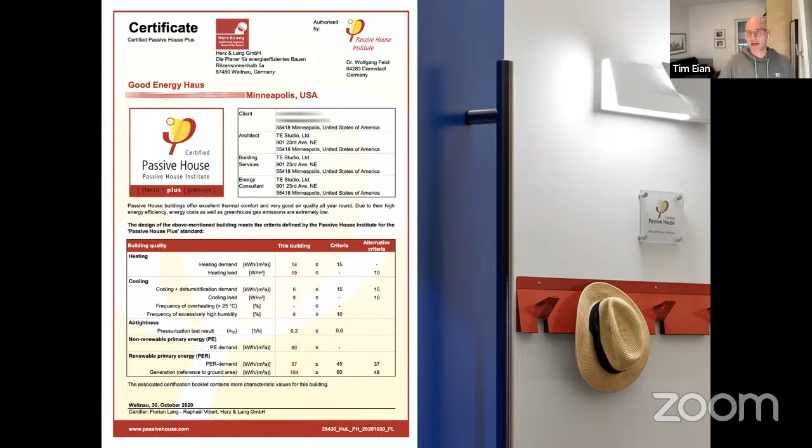Just a couple of impressions here then. Again, hopefully at some point, maybe in the summer, we can do bigger tours again. We've done a couple of smaller tours. I love having people over and showing it to them in the flesh. I'm thankful that I can do it this way for you tonight.

There's our outdoor room in the backyard. We spent a lot of time out there this year for obvious reasons.

So that was that. And then last but not least, here's the energy dashboard. Is that coming across, Yuka? Yes, we can see it very clearly here. Okay, perfect. So he asked me to show that to you.

So I built a dashboard from eGauge. For all the nerds out there, I monitor just about every circuit and then group them into meaningful groups of consumers so that they tell me something. I monitor usually on the fly what you see here. The first graphic in the upper left-hand corner is just a flow of electricity.

At the moment, obviously, the sun is set, so we're pulling from the grid, and the little bit that goes to the PV panels is really the standby load for the inverter. Then all the little dials next to it are things I made to show me on the fly what anything in the house is drawing, things like cooking, dishwashing, hot water.

So you can see right now in my home, my network is pulling electricity. I'm sitting on 600 watts of plug loads, which is anything that's in a jack or lights. My media center is pulling 100 watts because the rest of my family is watching Downton Abbey next door. The refrigerator is on standby at 5 watts, and my ventilation system is drawing 37 watts.

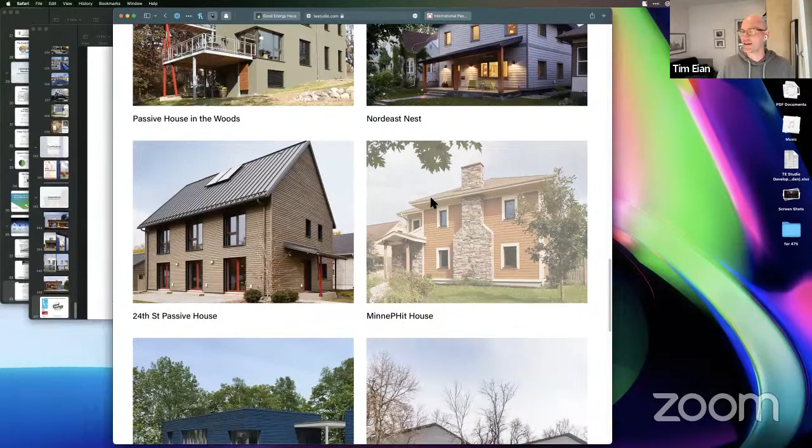Yep, there, okay. So if any of you are interested for a deeper dive, go to my website at testudio.com. On the main page, when you scroll down, if you really want to do a deep dive on retrofits, find a project called the MinnePHit House. It's sort of in the middle on the right-hand side, click on that. On the page for that building, you can see before and after shots. There's a YouTube video there that's like an hour or so long, where I explain in nitty-gritty detail how we took this shitbox, that's a technical term, from 1935 and turned it into an absolute stunning super performer.

By the way, this is the first certified passive house in Minneapolis, or in the Twin Cities, period. Also, my partner, who's now retired, designed the very first in all of the Americas. So we've been doing this a long time, we have a lot of experience with it. My life can be pretty exciting, I get to do a lot of firsts and break a lot of molds, and this was one of them. This actually ended up being the first cold climate passive house retrofit anywhere.

I worked with the Passive House Institute in Darmstadt on this, and we did this, I think, in 2012. It's in South Minneapolis on Lake Nokomis. The owners are super nice, and they've also opened this up to the public many times.

With COVID it's been tough, but maybe a quick plug: twice a year, if you want to see a passive house, look for something called the Passive House Open Days. They happen in June and in November, and we typically try to get at least one, if not multiple, local projects to open their doors. It's basically just an open house, free for all. I've done this for 13 years running since they came out with that program, so if you ever want to see something and talk to people, that would be the day to do it.

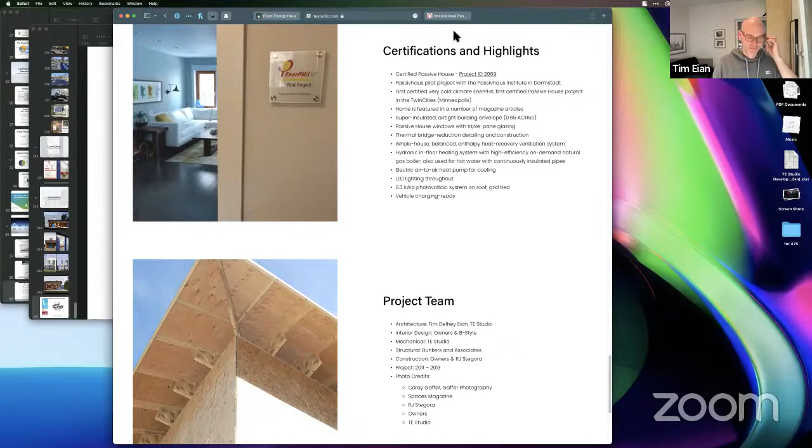Well, that's very good, and it's good to have that kind of resource where people can go check it out, those who are interested. As you said, we could easily talk many more hours about this, but we have a limited time frame here. The other thing that has really come up, and you mentioned this is a very common question you get, is the money part of the thing. How much do these things cost, and how do you make them as affordable as possible? Can you share some information about that?

Oh, absolutely, I'd love to. First of all, I was able to build one - you don't know me, but that should tell you something. The good news is that a lot of it is not that different from standard construction, so pricing it is not that difficult. There are some things that cost more, like building a second wall or buying a really good window. The point is, similar to buying a solar panel, you make an investment. That's not just money you're throwing in the wind - that money goes towards something, and that something is you're paying your utility bill forever forward with it.

I work on projects big and small - I do multi-million-dollar custom homes, but I also work here in Minneapolis on affordable housing projects. We actually have one under construction right now in Northeast Minneapolis. So I see this on the smallest, cheapest, most basic of basic, and I see it on the lavish. What I will tell you is that if you're building a $1 million plus home, generally the passive house stuff really doesn't cost anything, because clients who build in that price range typically overbuild - they build better than code, and the builders they associate with do that too. So if you're already building a better wall, buying a better window, putting heat recovery ventilation in, it's a small and most of the time negligible step to go from there to passive house.